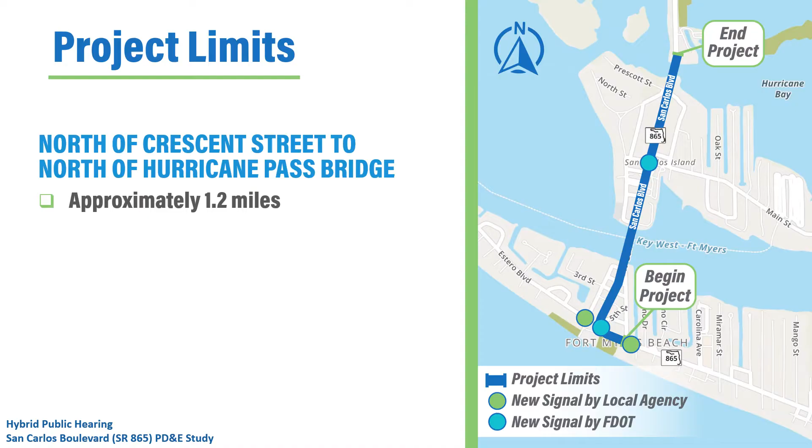The land use along San Carlos Boulevard is a mix of commercial, vacant, and residential development.

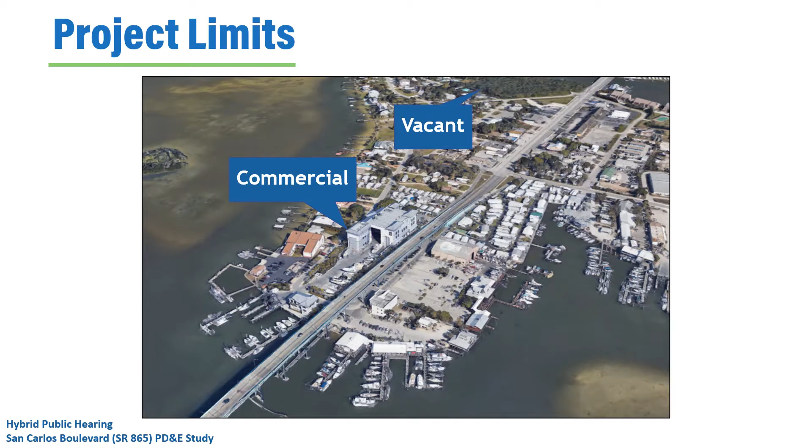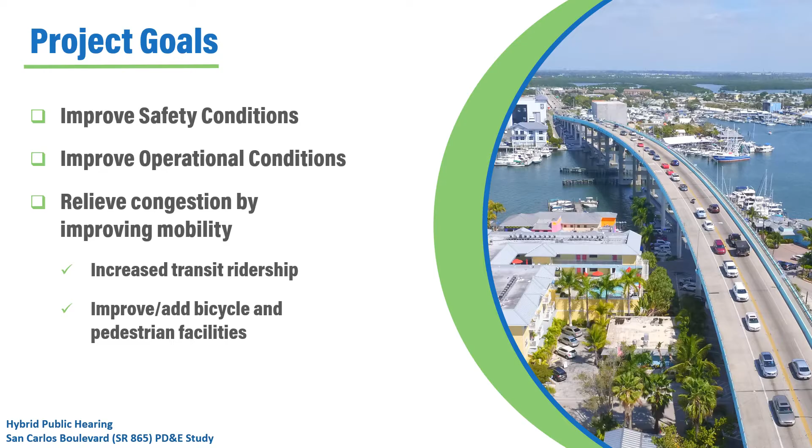The project goals of this study are to improve safety and operational conditions and relieve congestion by enhancing multimodal access along San Carlos Boulevard for pedestrians, cyclists, motorists, and transit riders. The need for proposed improvements is indicated by a lack of pedestrian facilities and frequent congestion as vehicles access Fort Myers Beach, especially during peak season.

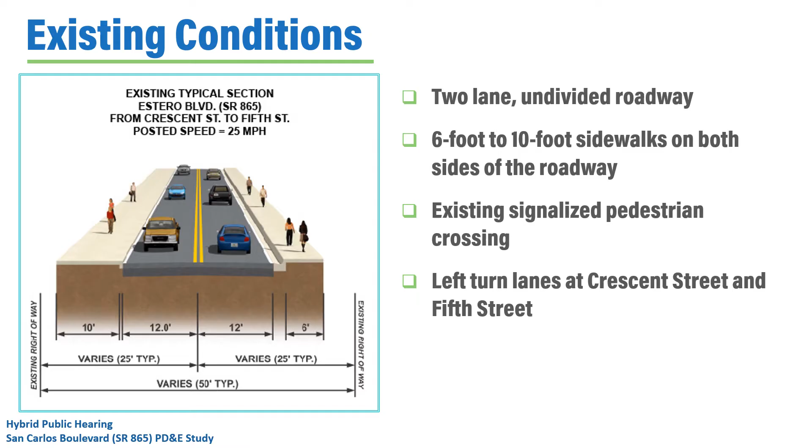Within the project limits, San Carlos Boulevard from north of Crescent Street to the intersection at 5th Street is a 2-lane undivided roadway with 6-foot to 10-foot sidewalks on both sides of the roadway and a signalized pedestrian crossing. There are also left turn lanes onto Crescent Street and 5th Street.

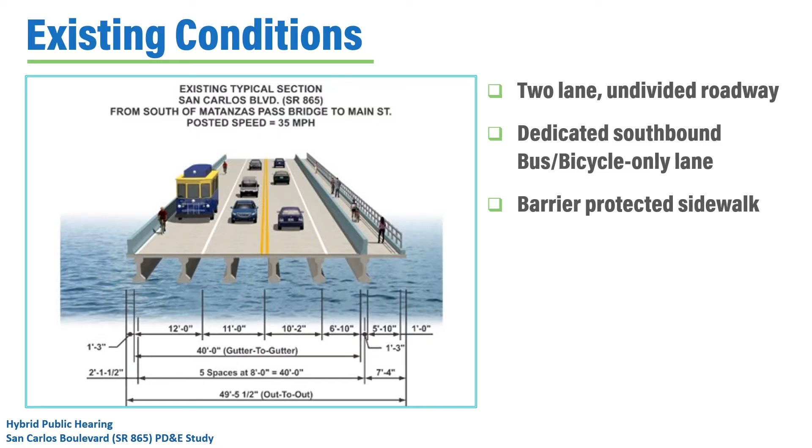From 5th Street to Main Street, San Carlos Boulevard is primarily an elevated 2-lane, undivided urban minor arterial roadway with a dedicated southbound bus and bicycle-only lane and a barrier-protected sidewalk on the east side of the bridge.

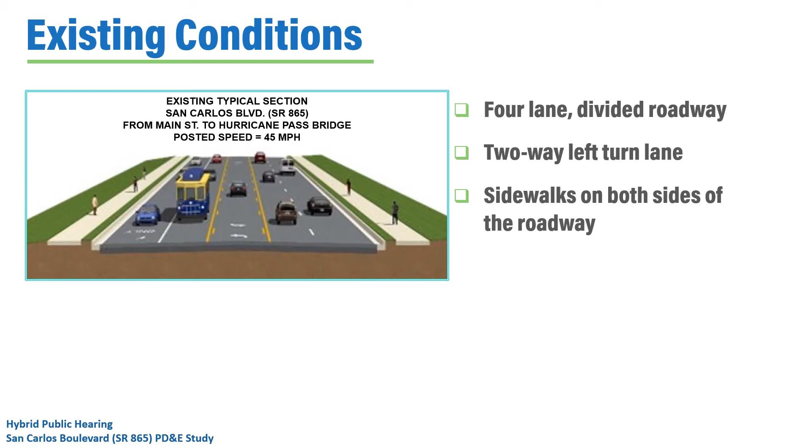From Main Street to Hurricane Pass Bridge, the roadway transitions to a 4-lane, divided minor arterial roadway with a 2-way left turn lane and sidewalks on both sides of the roadway.

At Hurricane Pass Bridge, the roadway transitions to a 4-lane divided roadway with a designated southbound left turn lane and a barrier-protected sidewalk on the east side of the bridge. The existing speed limit within project limits varies from 25 miles per hour to 45 miles per hour.

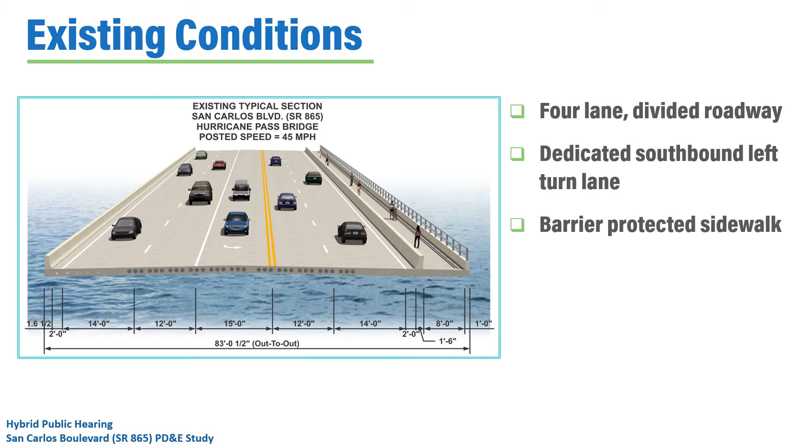Throughout this PD&E study process, FDOT has looked at many different concepts to provide mobility and operational improvements on San Carlos Boulevard. At the Alternatives meeting on February 27, 2018, held as part of the Operations Analysis Study, we asked for your input on proposed improvements to San Carlos Boulevard. Based on your comments and additional environmental and engineering analyses, a preferred alternative was selected for San Carlos Boulevard.

The preferred alternative for San Carlos Boulevard results in 3 typical sections throughout the corridor. The first section will convert the existing transit-only lane to a general-use lane, providing motorists 3 lanes along Matanzas Pass Bridge, 2 southbound lanes, and 1 northbound lane.

The outermost southbound lane will be an 11-foot wide travel lane, while the innermost southbound travel lane will be 10 feet wide. The northbound lane will be an 11-foot wide travel lane.

The 5-foot 10-inch barrier-protected sidewalk will be expanded to an approximately 8-foot 5-inch shared-use path to accommodate both pedestrians and bicyclists along the eastern side of Matanzas Pass Bridge. San Carlos Boulevard would be widened to the west to accommodate 2 southbound lanes onto the Matanzas Pass Bridge south of Main Street.

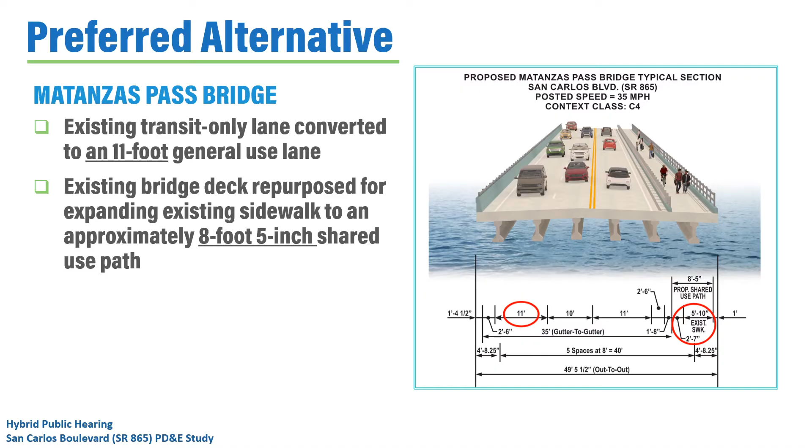The second section will include resurfacing and restriping San Carlos Boulevard between Main Street and Hurricane Pass Bridge to accommodate bike lanes in each direction of travel.

The existing signal at Prescott Street and Buttonwood Drive will be converted to a conventional signal operation. The existing alternating signal mode will be converted to conventional signal operation once the two southbound travel lanes are able to cross Matanzas Pass Bridge.

Additionally, FDOT is conducting a speed study along this portion of San Carlos Boulevard. To promote a safer travel environment for bicyclists, FDOT is planning to reduce the posted speed limit from 45 miles per hour to 40 miles per hour on San Carlos Island.

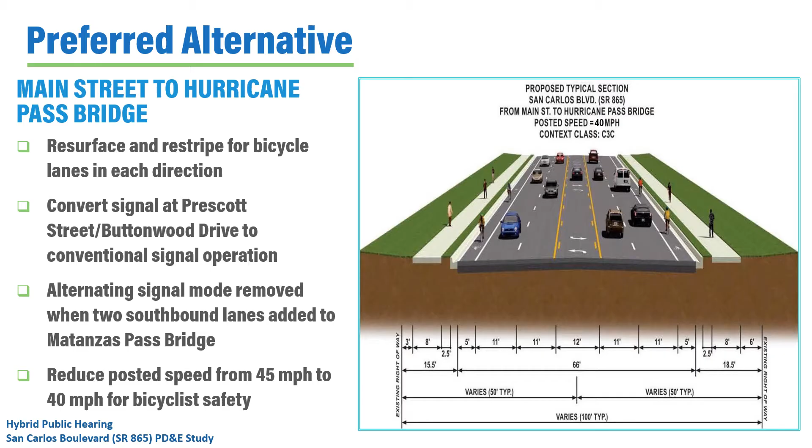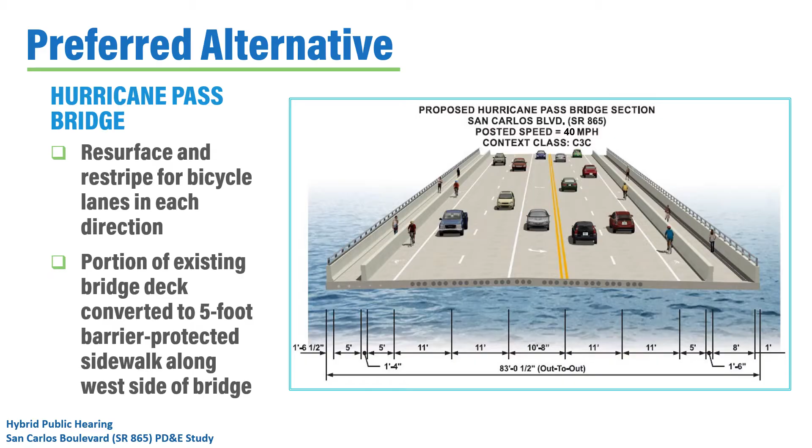The third and final section will modify Hurricane Pass Bridge to accommodate bicycle lanes in each direction of travel, as well as add a 5-foot barrier-protected sidewalk along the western side of the bridge. There will be two 11-foot travel lanes in each direction.

There will be a 10-foot 8-inch dedicated left turn lane in the southbound direction. Additionally, in partnership with Lee County and the town of Fort Myers Beach, FDOT incorporated Lee County's Seafarers Alternative for the 5th Street intersection as part of this project. A new signal will be installed at the 5th Street intersection to replace the existing pedestrian crosswalk signal. New bus bays will be constructed near the Margaritaville Resort and at Crescent Beach Family Park.

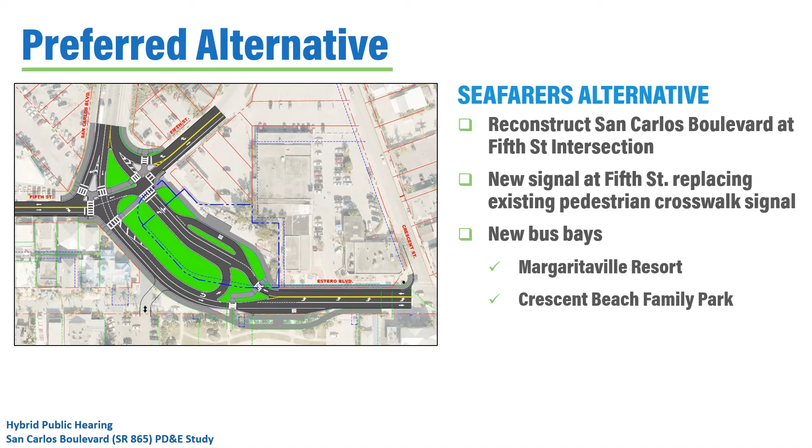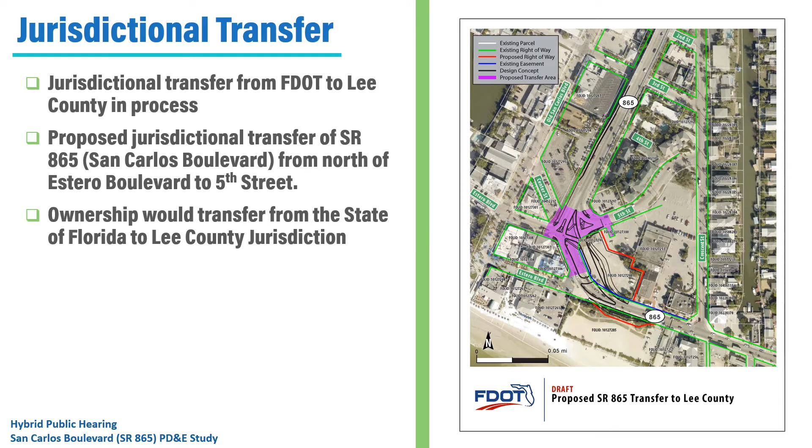The reconstructed intersection will enhance public transit access, pedestrian safety, and provide opportunities for landscaping and other aesthetic features. The Seafarers Alternative will include a jurisdictional transfer. As part of this hearing, FDOT is accepting comments on the proposed jurisdictional transfer of the portion of State Road 865, also known as San Carlos Boulevard, from north of Estero Boulevard to 5th Street. The ownership of this roadway would transfer from the state to county jurisdiction.

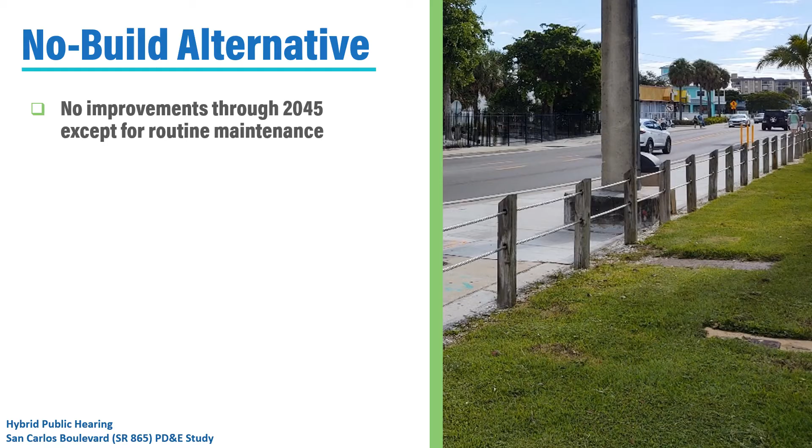Throughout this study, a no-build alternative has also been considered. The no-build alternative assumes that no improvements are made to San Carlos Boulevard through the year 2045, except for routine maintenance.

Advantages of the no-build alternative include no right-of-way needed, no design, right-of-way, or construction cost, no delays to motorists or inconveniences to property owners along the project corridor during construction, and no construction impacts to the natural, physical, cultural, and social environment.

Disadvantages include: it does not meet the purpose and need for the project, it's incompatible with the Lee County MPO Long Range Transportation Plan, it increases risk of crashes involving pedestrians or bicyclists as traffic volume increases on San Carlos Boulevard over time, and it does not provide multimodal transportation options for the community.

The no-build alternative remains a valid option and will continue to be evaluated until the completion of the study.

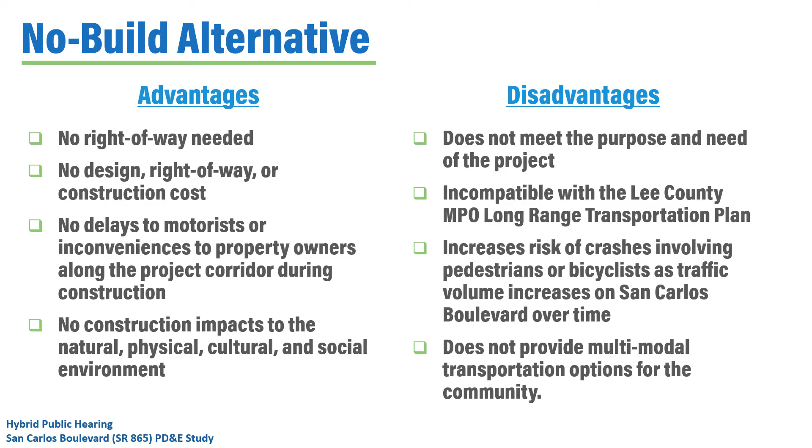FDOT evaluated environmental and socioeconomic factors relating to the proposed improvements in accordance with the National Environmental Policy Act of 1969 as amended, and other federal requirements. The evaluation considered the effects of mobility improvements on San Carlos Boulevard on threatened and endangered species, wetlands and floodplains, contamination, Section 4(f), water quality, air quality, highway traffic noise, cultural and historic resources, land use, aesthetics, construction effects, and right-of-way requirements and relocations. Please refer to your handout and display boards for more details on these factors.

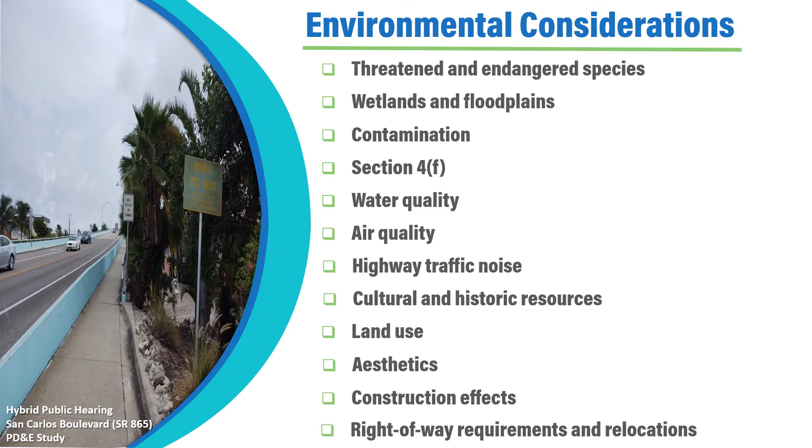Threatened and endangered species are allowed special protection under the Endangered Species Act of 1973, as amended, and Florida statutes. FDOT assessed species within the project limits and, through ongoing coordination with U.S. Fish and Wildlife Service, has determined that the proposed project may affect, but is not likely to adversely affect, the existence of certain federally listed threatened or endangered species.

The animal species include the green sea turtle, American crocodile, American alligator, Florida bonneted bat, and the West Indian manatee. In addition, the project may affect, but is not likely to adversely affect, the following state-listed threatened or endangered species: the roseate spoonbill, little blue heron, reddish egret, tricolored heron, and the least tern.

Coordination with U.S. Fish and Wildlife Service regarding the final status of these has been completed. U.S. Fish and Wildlife Service concurs with the determinations of effect and supports the project implementation measures and commitments for protected species. If the preferred alternative is approved by the Office of Environmental Management, FDOT District 1 will continue to work closely with environmental agencies in future phases of the improvements to meet all environmental permitting requirements.

FDOT evaluated wetlands within the project limits in accordance with Executive Order 11990, Protection of Wetlands. The proposed improvements are not anticipated to directly or indirectly impact wetlands or surface waters.

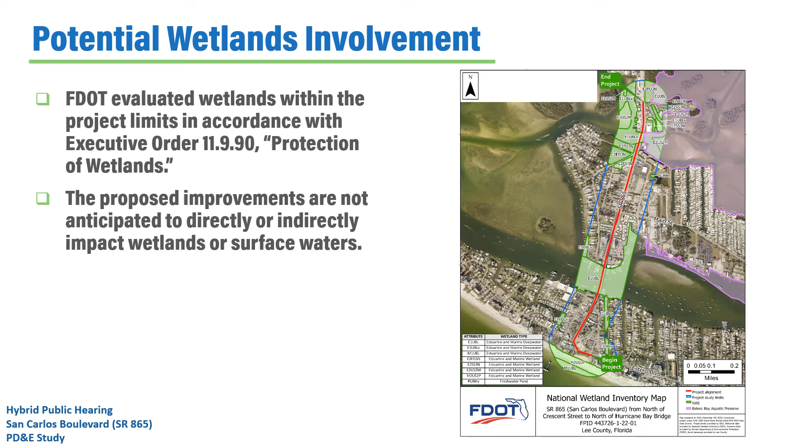The project has been evaluated for potential floodplain involvement in accordance with Executive Order 11988, Floodplain Management. The entire project is located within 100-year floodplain zone AE and VE and will involve minimal encroachment within the coastal floodplain. There is no significant change in flood risk, and the proposed improvements will not result in adverse flooding or floodplain impacts in the project vicinity.

There will be no significant change in the potential for interruption or termination of emergency services or emergency evacuation routes as a result of project construction.

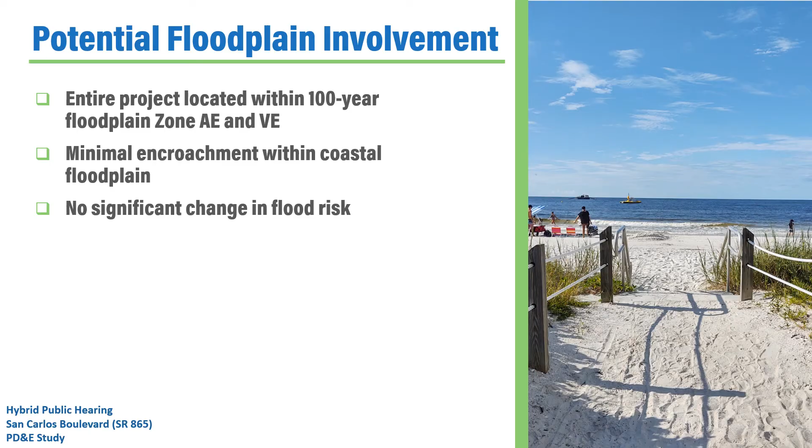Results of the environmental contamination screening show that 7 sites were ranked high for potential contamination, 1 site was ranked medium for potential contamination, and 5 sites were ranked low for potential contamination.

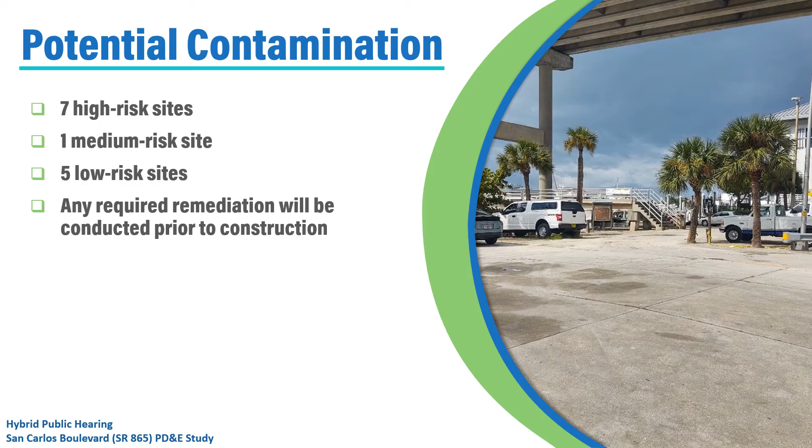For sites that are ranked low for contamination, no further action is required at this time. For sites with a risk ranking of high or medium, the FDOT project manager and the District Contamination Impact Coordinator will coordinate on further actions during the design phase that must be taken to address contamination issues. Before construction, specially trained crews will address contamination in these areas as required. Locations of these sites are shown in the concept plans.

Section 4(f) of the Department of Transportation Act of 1966 requires agencies using U.S. DOT funds to consider impacts to public parks, recreation areas, wildlife refuges, and historic or archaeological sites of national, state, or local significance.

Proposed improvements include a bus stop located along Crescent Beach Family Park's northern landscape buffer. As proposed, the project will impact approximately 0.14 acres of property from Lee County's Crescent Beach Family Park.

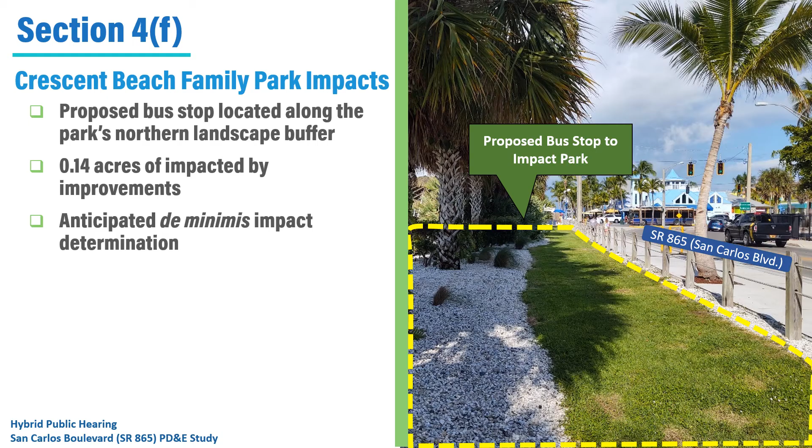As part of the project development process and in accordance with Section 4(f) of the Department of Transportation Act of 1966, the FDOT is seeking comments from the public concerning the effects of the project on the activities, features, and attributes of the park. The FDOT intends to make a de minimis impact determination for this resource. A de minimis finding confirms that the impacts to the activities, features, and attributes of the park are minimal.

The total right-of-way to be acquired for the proposed improvements is approximately 0.94 acres. The project right-of-way needed is as follows: 0.14 acres from Lee County's Crescent Beach Family Park, 0.73 acres from Lee County's Seafarers parcel, and 0.07 acres from the town of Fort Myers Beach vacant parcel.

All right-of-way is to be donated by Lee County and the town of Fort Myers Beach. There will be no change in ownership for the impacted portion of Crescent Beach Family Park. No residential or business relocations will result from proposed improvements.

All right-of-way acquisition will be conducted in accordance with Florida Statute 339.09 and the Federal Uniform Relocation Assistance and Real Property Acquisition Act of 1970, commonly known as the Uniform Act. The right-of-way specialists who are supervising this program are here tonight and will be happy to answer your questions.

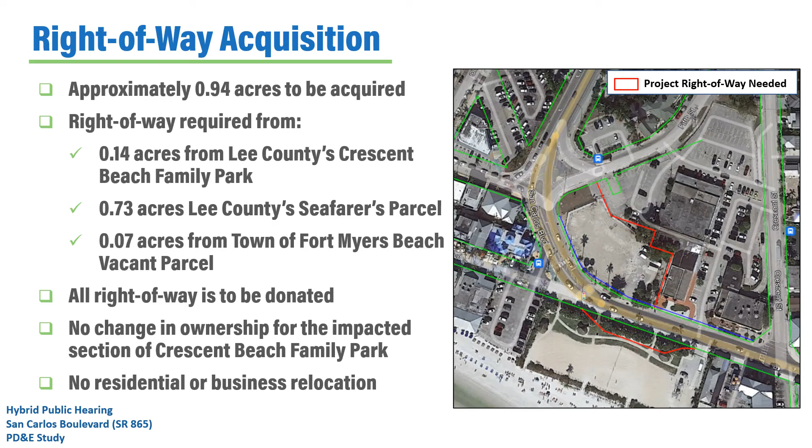There is no significant impact anticipated for water quality, air quality, highway traffic noise, land use, or aesthetics. Minimal construction effects are anticipated.

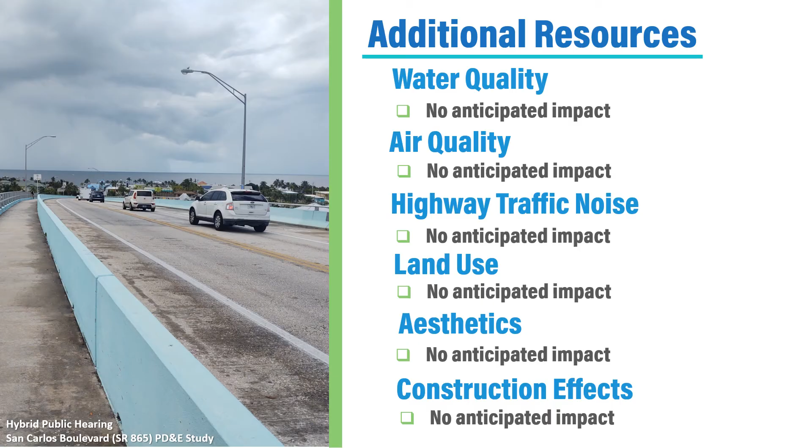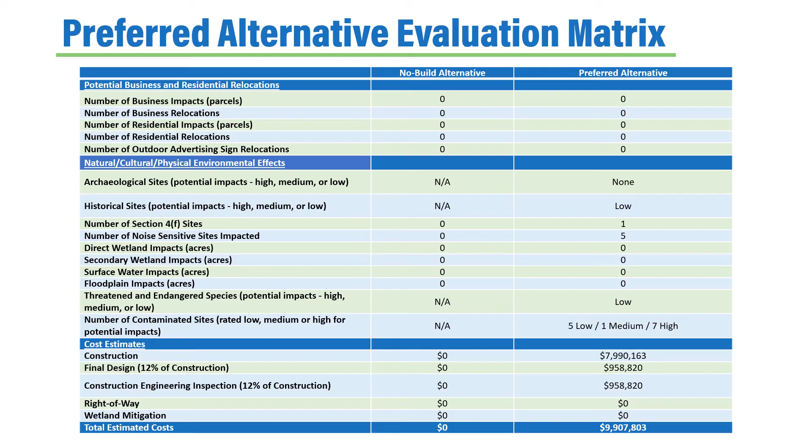This matrix shows a detailed comparison of the preferred alternative and the no-build alternative, including potential effects to the social, cultural, natural, and physical environment. It also identifies preliminary cost. The department's preliminary estimate of the total project cost is approximately $9.9 million.

The department anticipates completion of this PD&E study by spring 2022. The detailed study schedule is available in the display documents and in the handout.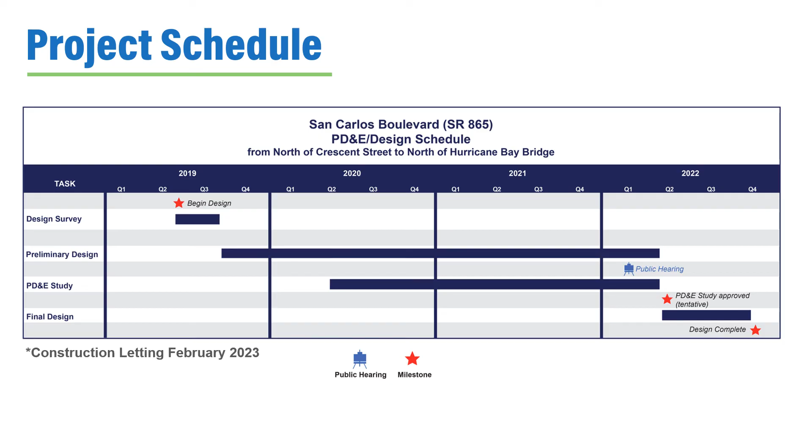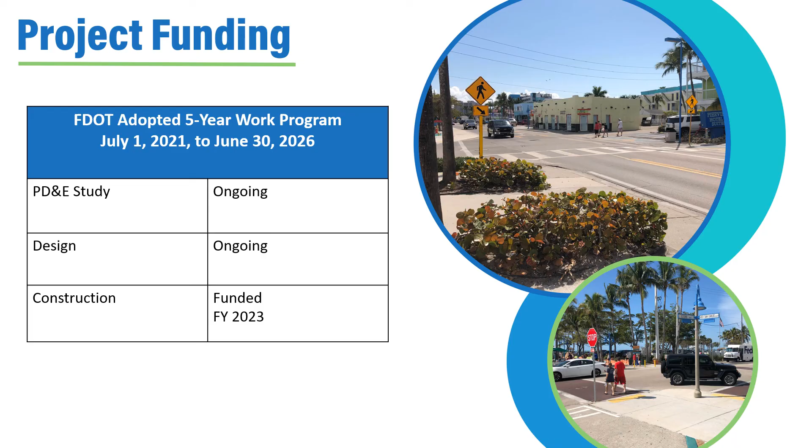At this time, FDOT's 5-year work program includes funding for the ongoing PD&E and design phases. The construction phase will be funded in fiscal year 2023. Construction cost is estimated at $7.9 million.

We encourage you to review project information and provide comment at the virtual or in-person event, through the project website, by email or by mail, postmarked or sent by February 17, 2022, to Richard Oujevolk, Florida Department of Transportation, at 801 North Broadway Avenue, Bartow, Florida 33830.

You may also visit the project website at www.swflroads.com/SR865/San Carlos Boulevard Design to view the project documents on the website. Comments may be submitted at any time, but in order to be included in the hearing record, comments must be submitted or postmarked by February 17, 2022.

Technical documents with project information are also available for review at the Town of Fort Myers Beach Public Library at 2755 Estero Boulevard, Fort Myers Beach, Florida 33931, and at the FDOT Southwest Area Office at 10041 Daniels Parkway, Fort Myers, Florida 33913, until February 17, 2022.

The purpose of this PD&E study is to evaluate engineering and environmental data and document information that will aid FDOT District 1 and the FDOT Office of Environmental Management, or OEM, in determining the type, preliminary design, and location of the proposed improvements. This hearing follows all federal and state rules and regulations.

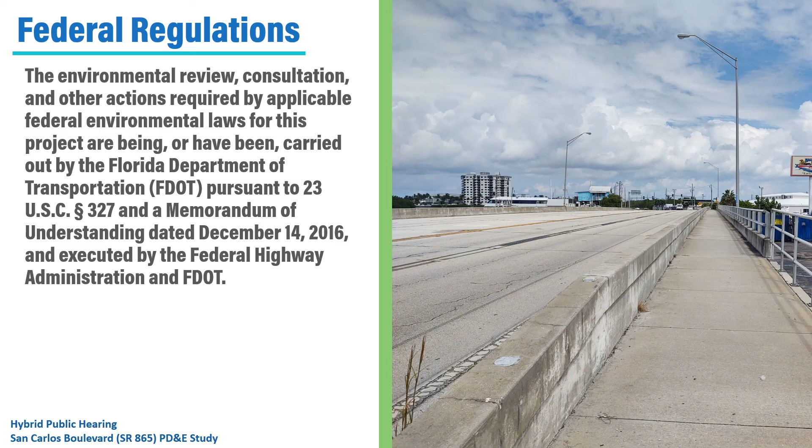The environmental review, consultation, and other actions required by applicable federal environmental laws for this project are being or have been carried out by the Florida Department of Transportation, FDOT, pursuant to 23 United States Code, Section 327, and a Memorandum of Understanding dated December 14, 2016, and executed by the Federal Highway Administration and FDOT.